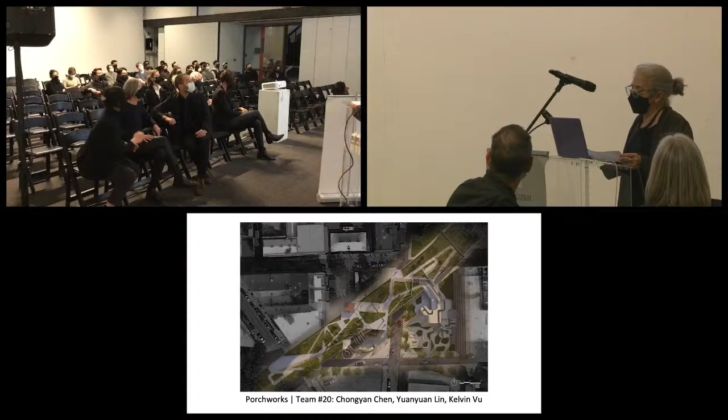Second place, Pop-Up by Team number 6, Qiyi Huang, Ravina Puri, and Valerie Tsi. Porchworks, Team number 20, another second place, Chongyan Chen, Yuanyuan Lin, and Kelvin Vu.

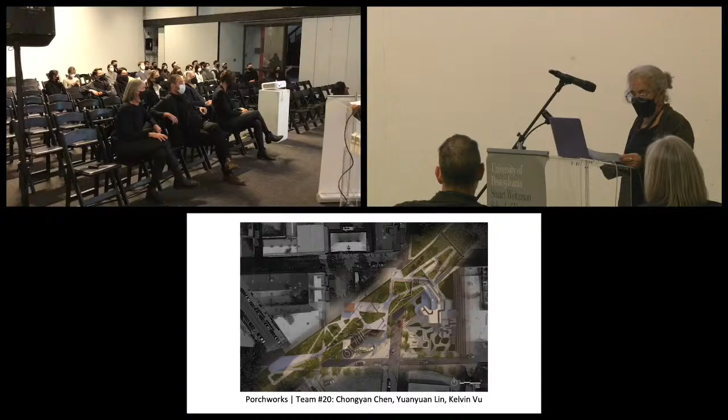The last second place is Porchworks, that was team number 20. The last one is The Glaze by team number 23, Chengnan Gao, Maxwell Lent, and Shi Yi Chi.

And then there was a host of honorable mentions. Transitory Permanence, Rachel Seto, Kang Truong, Ji Yi Zhang. That was another second place.

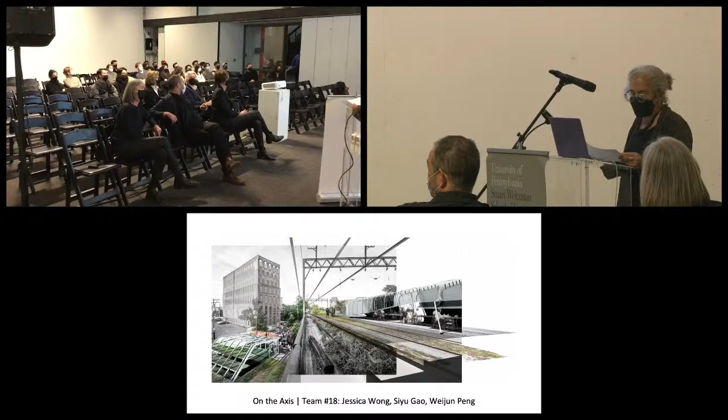Honorable mentions, Resurge, team number 9, Shi Shuang Song, Sophie Wajalewicz, and Grace Infante. Honorable mention on the Axis, Team 18, Jessica Wong, Siyu Gao, and Wei Jun Peng.

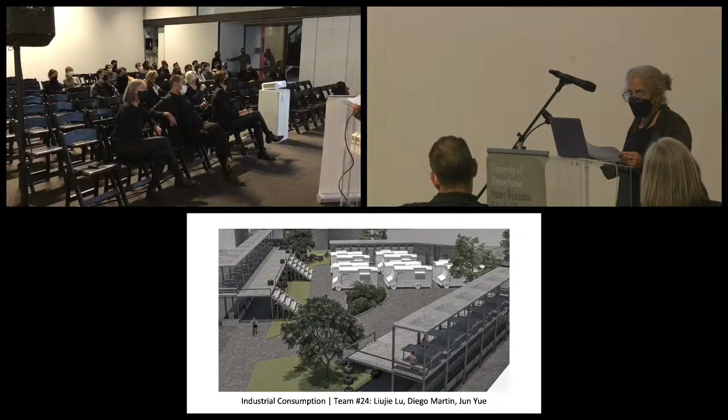Breathing Clouds, Team number 22, Hedi Mao, Shenyi Zhang, and Xiaoyu Zhou. Industrial Consumption by Team number 24, Liujie Lu, Diego Martin, and Jun Yue. And the last honorable mention team, Daniel Lutze, Boyu Xiao, and Rongxuan Zhou.

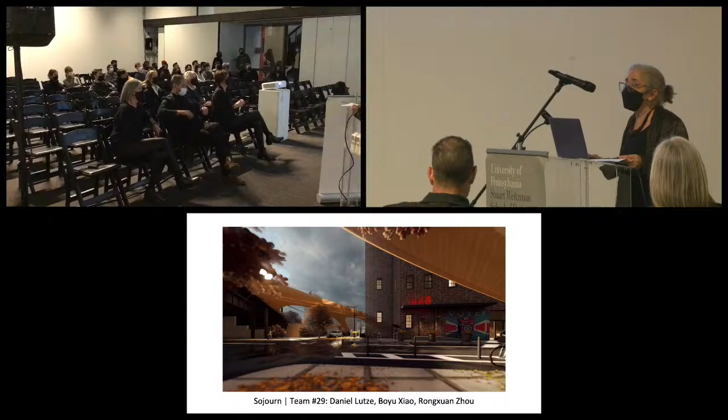Congratulations, everyone. They were just wonderful entries, as you can see, and we're really proud of our first-year students for doing this great, high-quality work. Congratulations, everyone.

Thank you, Annette, and thank you, Daniela, our 2 coordinators for first year, and of course, warmest congratulations to the students. Absolutely stunning work, really happy you won these awards, and proud of you. So with that, congratulations again.

We're going forward. Do we have another slide? Can I do it? Yeah, you can do one more. Back one, it goes back one. Back one? There you go. Thank you, Laurie. We're going to the presentation. Oh, that was interesting. No, I don't know how that happened. There you go. Am I standing on something? They keep it exciting, right? And keep you all awake.

Smith-Miller Hawkinson, one of my favorite offices in New York City. This is kind of interesting, you know, for all the people I know, there's very few architects that actually build in Manhattan, which is not an easy thing to do. Their office is one of the few that builds absolutely beautiful things in Manhattan, and so I thought it was time that Laurie came and showed us their beautiful work.

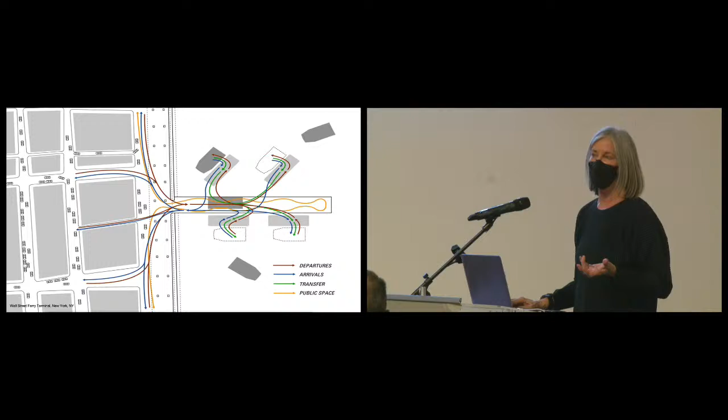We thought of this project as the gray in the middle of the pier - it just clips on the edge and leaves the majority of the space open, because there's very little open space in Lower Manhattan. We wanted that to be this kind of surface for people to just walk out of their offices, have lunch, and what have you.

So there you can see it clipped on. We made very large letters that you could see from a distance as you're coming in on the ferry. I thought of it as this kind of aircraft carrier, waiting, anticipating things that might happen on that open surface. This is the door as it opens, and it really tries to extend this building to be much bigger than it is in the space.

This is a photograph by Arietta Atali, who took a number of the black and white photos you'll see through this presentation. I love this one because it shows how thin that surface is between the inside and outside. Through a number of projects we were trying to find that continuity, that continuous condition from outside to inside, and the kind of extension of the door as it opens up - that idea of thinness. This is a model that I think Ferda made, if I'm not mistaken.

This is a model for Corning, in the very beginning, where we were charged with creating a new entrance to the building - a new piece on the front of the museum up in Corning, New York.

One of the ideas came because when we first drove up there to see the site, I kept looking and thinking, where is the glass? I kept scanning the landscape for glass, thinking there's gotta be glass here somewhere. So that was something we tried to demonstrate at the entry, where you'd see glass on edge and create this attenuated surface, this condition of entry.

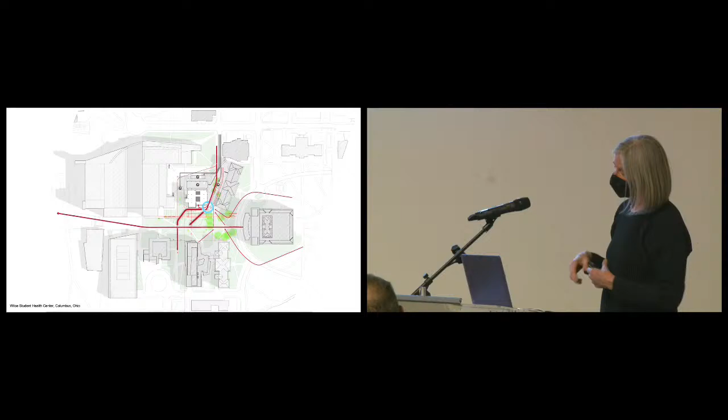So a similar condition here at Ohio, where we're adding on to these really brutalist buildings. We had a Wallace Harrison building we were adding onto at Corning. Here, we're putting this new piece on this precast building, right off the oval at Ohio State University. There's a tremendous amount of circulation going back and forth across campus, cutting through, and this is the corner where we're operating.

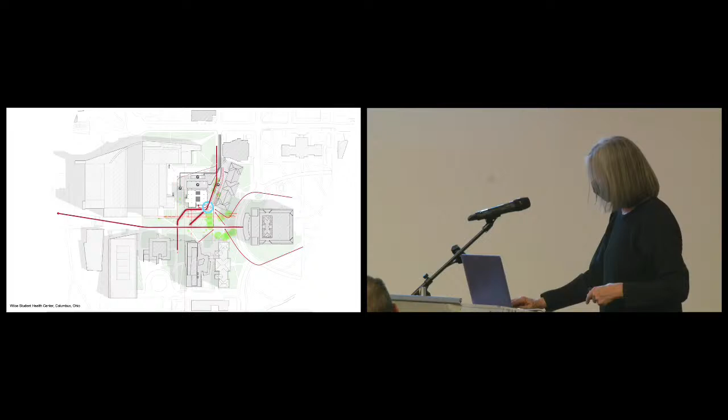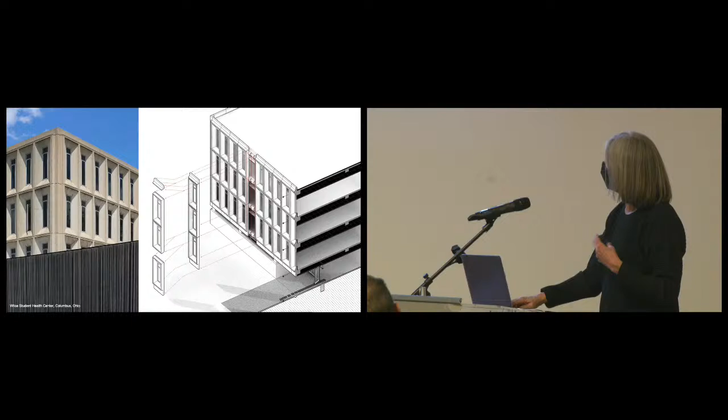We wanted to work here with this kind of vocabulary of the precast, but for our addition, thinking about what we could do today with this material that we couldn't do when this was built—maybe they could do it too. It's kind of ridiculous to say you couldn't, but we started to experiment with this precast panel, wanting to make a very soft, curtain-like effect, instead of the hard window frame on the upper building, so they'd share the same system but be expressed very differently.

So we started—let's see, I don't know why it's not happy. It's just not happy, I don't know why it's doing that, it's like flying around here. But I'll try it—well, I can see it here. It's still on the stream. Am I standing on something? It's like, if it can go wrong, it will go wrong, right? Maybe I should be advancing it with this thing—do you think that would help? Oh no, it doesn't even like this, it doesn't really like this. There it is, there it is. I'll go back one. It's okay.

I was telling Hannah that I once spoke in Mexico City and my whole slide tray was flipped upside down and went into people's coffee. So this is not bad, this is not bad at all. I don't know. You want to have a slide tray? I know slide trays—remember slide trays?

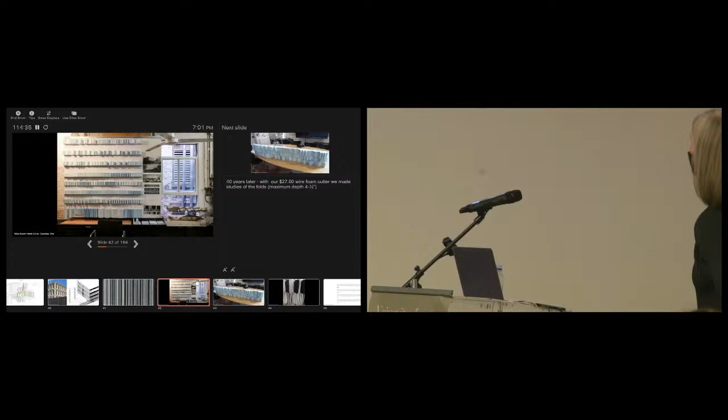Okay, so then we sent those out, we got the pieces made. We went to Columbus to look at them in the light, because you always want to look at them in the light of the place where you're working, since the light's very different in New York. So we looked at them and changed some things. These are some of the profiles that we ended up working with. We had 4 panels, and the edge pieces are all the same dimension, so we could flip these around and get more combinations than one would get by just layering them.

This is the construction drawing. You wouldn't have this today, by the way, because you'd have a very ugly Revit file — I just say ugly in quotes. But what you're seeing here is the form, and then there's the cast piece.

And there it is, going on the truck. So you have to figure out it's got to fit on the back of a flatbed, because it's got to get to the site. And there, dropping it in place. We had excavated some of the existing building so that it slides in. I love to see something that's so small become so big.

So then where the kind of softness ends, right where that's the base piece, right before it hits the ground — trying to control all of that. And so this is the guy, it's kind of twisting and taking you in. And then this curtain's on the 2 sides.

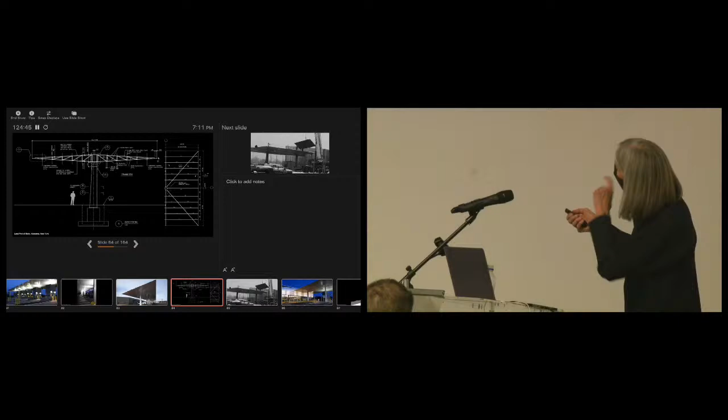But you know, if you get taken in here, that's where your car gets taken apart. So you don't want to go there. But basically, you're coming through, you end up here, and then you go. So here's the section through that.

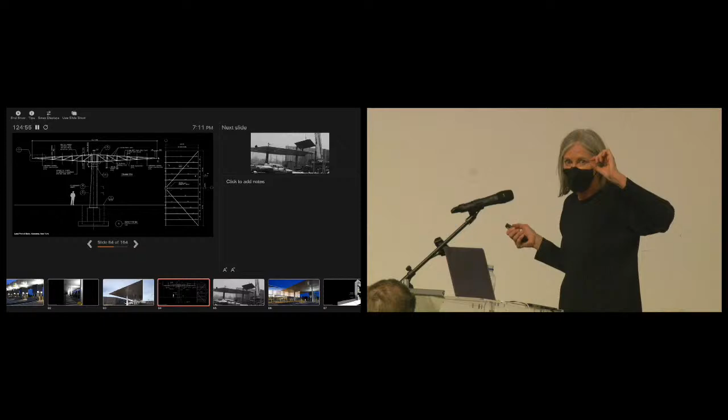So you can see that what we're doing is tapering to get to this very, very thin edge, so we get that appearance of lightness, even though in the center you can't really feel it because you're under it and you don't know its thickness. So this tapering happens on all sides.

And this is the rain gutter right there, so you have a little place for the rain to come. This is Sean Gallagher, if anybody knows Sean Gallagher. He did this—he actually works for DSR. He's really good. So here's it getting assembled.

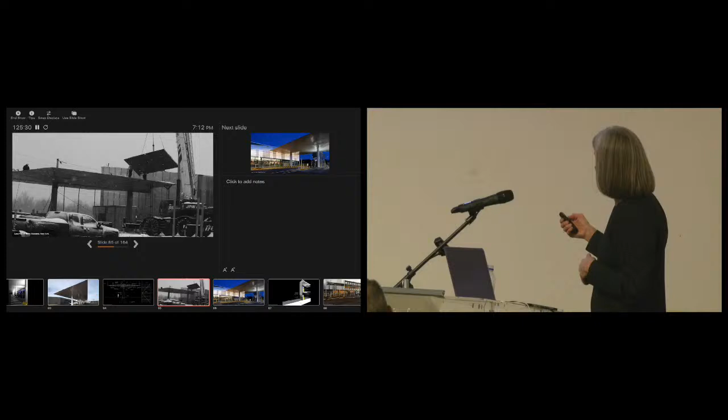Again, the pieces have to come in those dimensions. They're so cold up there—imagine touching the steel. This is one of the places where they say it's like 38 below, you know, in New York, and it's usually Massena.

So this is at the administration building, where the passenger cars pass through. Again, you would never go in there unless there's something wrong. But one of the things we developed at the facade was, because there's a security issue here, but also the question of bringing natural light in.

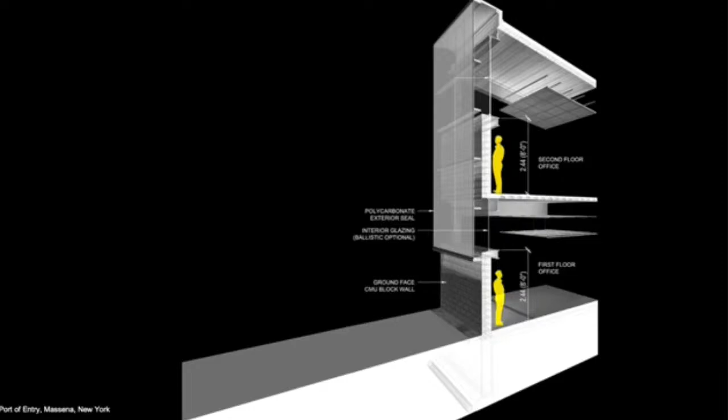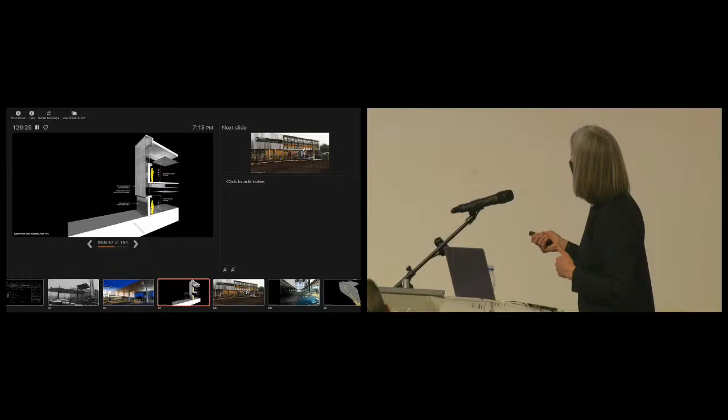So we made a double skin—we have a concrete block, but then we get clerestories, and in some of these we actually cut into the wall. The polycarbonate provides this layer of transparency and translucency for bringing light in, in this case from the north. And then here it is under construction.

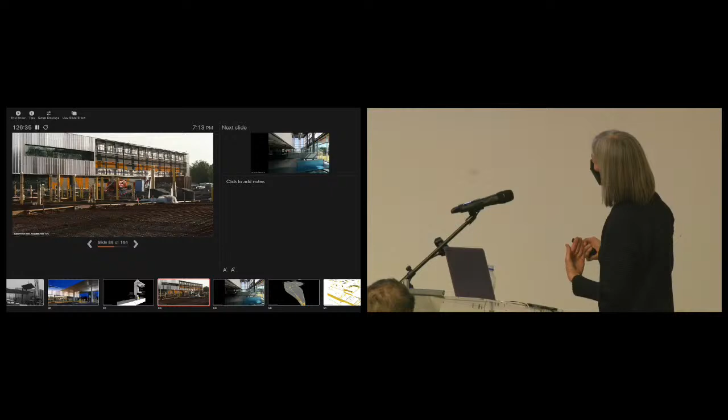So you can see we took the letters of the United States and we brought them up under the translucency, so that they kind of glow at night. And we used this material, the metal that's on yield signs—just like the sign is made out of, in that color. So that was what we used to make the big letters.

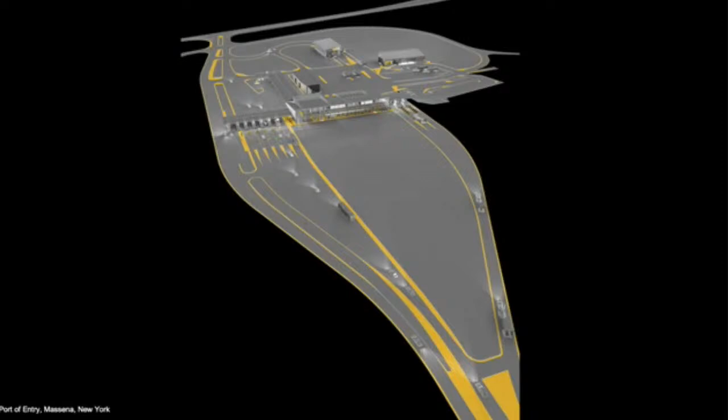So you see, we learned from Barbara. And then here's inside the building, right outside of passenger cars, and some of the structures, truss turn sideways for lateral bracing, the polycarbonate, and then this idea of no curbs. We also had this idea of yellow—we worked with Pentagram—being this area where it was safe to walk, where people could go.

So it was this wayfinding system, so wherever there's yellow, it was safe. Here's a crazy drawing by Sean Gallagher of all the yellow in the project, and you find it in buildings, so it kind of leads you into buildings, it leads you up to buildings. It's a place that's safe if you're a pedestrian.

So here's the site, and there's the yellow, and no curbs, and a lot of infrastructure for water, because we had to keep the existing port over here while we're building this new one. There's a river to the south, and we're making sure the water can move and run, and all the drainage can move back to the river and also be caught in certain areas and retained in bioswales.

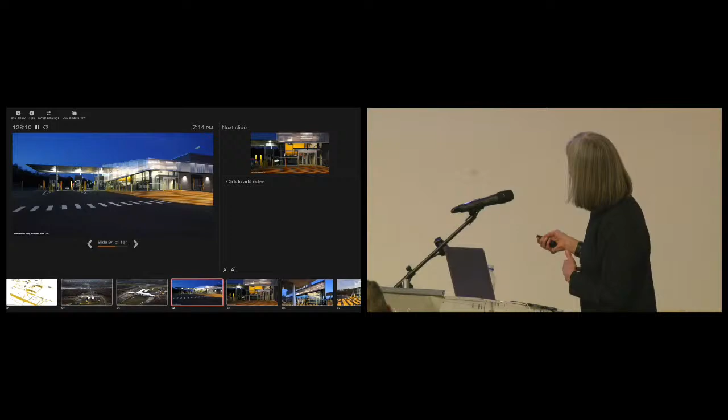So this is a kind of early on photo. Here's some of that yellow, you kind of walk across the white, and then this is all safe to walk on, safe to walk. Because it's all about cars moving and trucks moving, so you're kind of like, where do I walk?

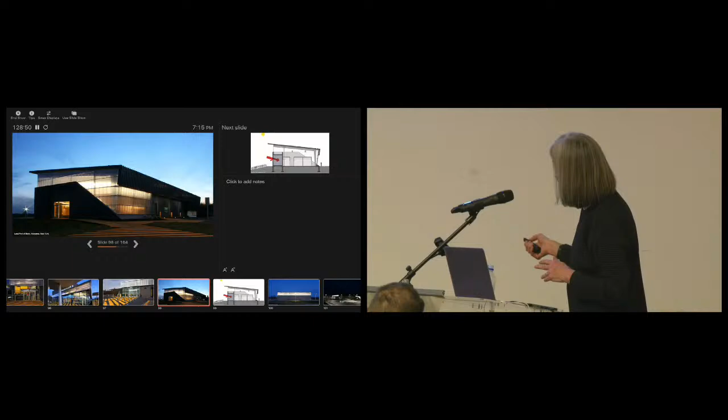Some details of the buildings. This is one of Henry's handrails that just kind of takes you up into this space where secondary or commercial vehicles are, connected right onto a kind of a funky edge there. This is a building for customs, yellow inside, so you kind of move here and go in.

This building has the fire suppression system. We couldn't put it in the ground because the water table was so high, so we decided to put it in the building. So this is really the fire suppression system.

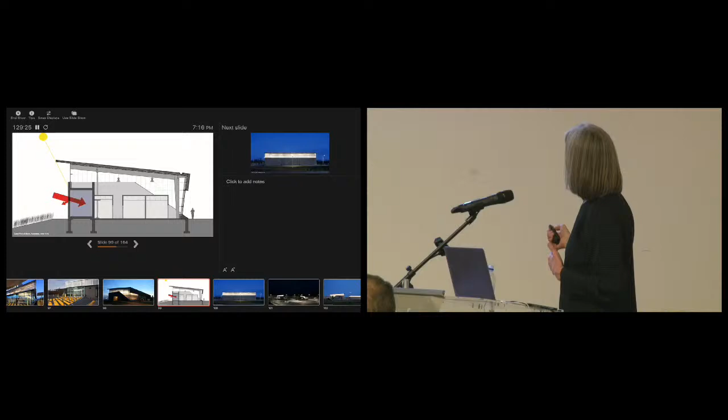This is some bioswale out here, but it's also acting as a counterweight. This column is working in tension, and this one is working in compression. This is compression, this is tension, holding it down, correct? Not propping it up. And then this is the kind of counterweight to that piece.

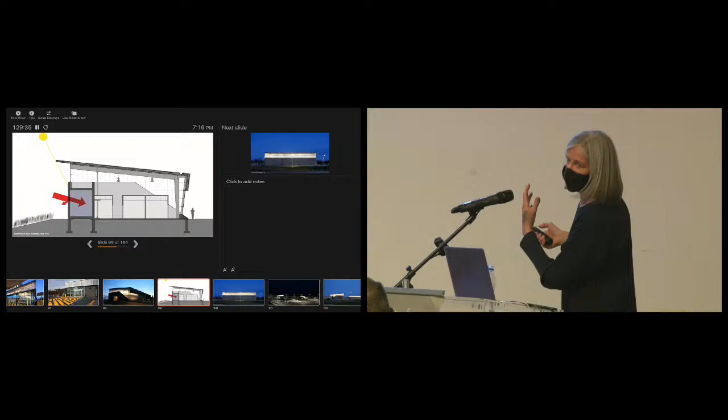So that's the facade on the exterior. So you're seeing some of that structure. Those are those tension columns, they're not really props. And then it kind of appears that this whole roof is floating, which is what we were interested in trying to achieve here, these floating conditions.

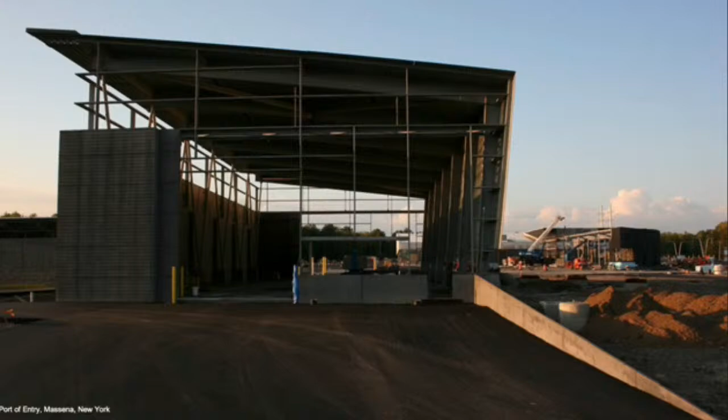And these are, I love this kind of very sinister view of this at night, two buildings. So I'm going to show you the second building, which is a truck scanning building, a whole building for scanning trucks. And again, this one is a cantilever, there's props.

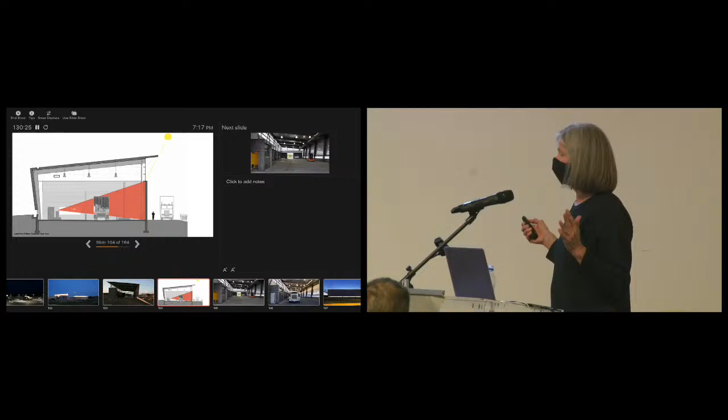And we convinced them - they wanted to buy a Butler building, just something off the shelf. Oh, we can buy a Butler building. And we said, no, we can build something for the same price as a Butler building. So we did, somehow we did it.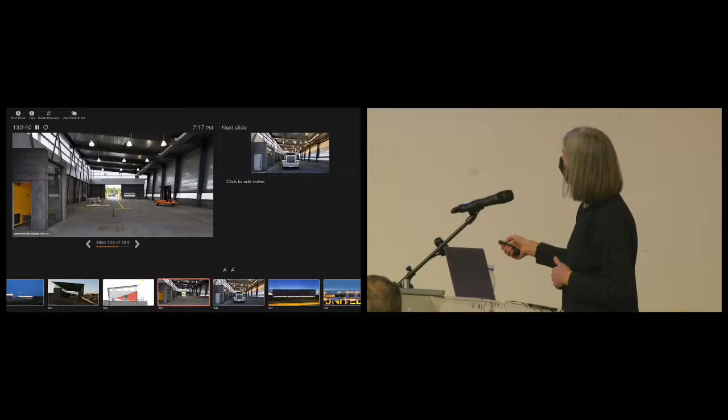But so this is all about just scanning a truck. The truck comes in, goes yellow, there's the yellow. This is where the person who's in the truck goes. They close the door, boom, they shoot it. There's the truck. But you're seeing again the structure that's propping, and this is in compression, and then bringing light in. In this case, the earth comes up against the building, and then you get this slot of a kind of floating condition at the exterior. And then these are those letters that fold up underneath.

So one more here is the Zerega Avenue. This is an EMS station in the Bronx. And this is a very little building. It's like fire department EMS, one of the first buildings that EMS built up in the Bronx.

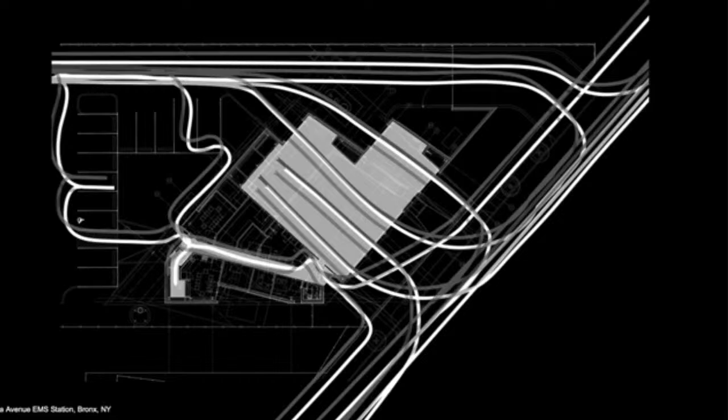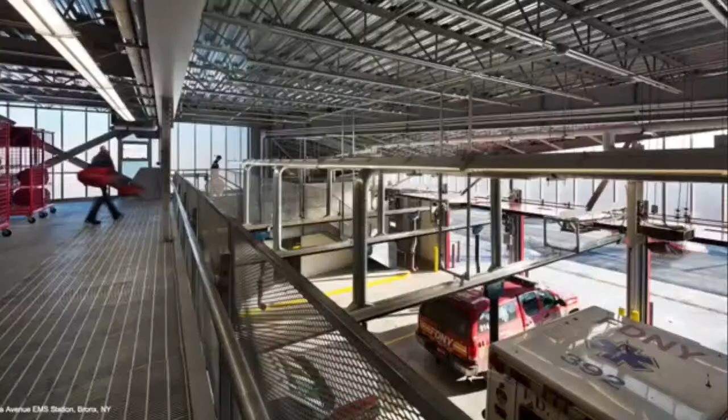It has a lot of movement and cars and vehicles going in and out through this little structure, as well as we're trying to move the air through it. And we tried to think how we could bring as much resiliency to the roof, and then natural ventilation as possible. It's a very rough and ready building.

This is really open so that they can hose all this down in here, and the vehicles are going in and out. And this is this giant gusset plate that is bolted rather than welded. And some of the interior conditions where we're just exposing a lot of the workings of the building here.

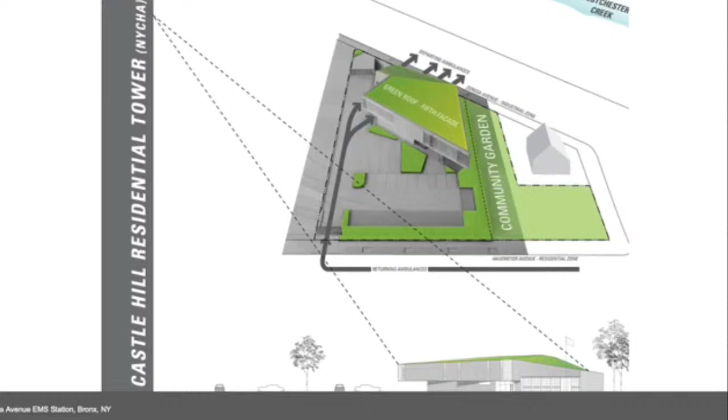And the roof of the building was meant to be a fifth facade. There's a very large NYCHA building, and this little building serves it as well. So this is a view from that roof. And the roof is the first EMS station or fire station for the city that had a green roof, which they did not want.

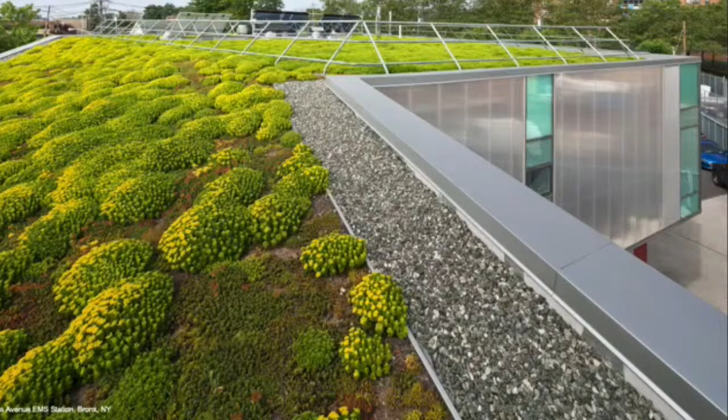And they were kind of saying, oh, we have a first green roof, but we had to convince them that it was a good idea. Some of the details, like the handrail, we're very into handrails, but leaning it in so it's not seen from the outside. Whenever you have a roof, you've got to have a handrail. So buyer beware, because it's something you get at the last minute, and it's not a pretty picture. We have hydronic hot water and solar tubes for bringing natural light down into the building.

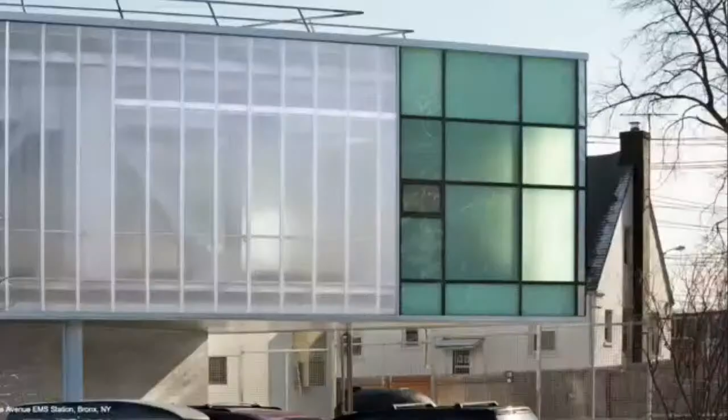We worked with Kate Orff, landscape architect from Scape, on this, and she and I argued with the city to have a cistern. There was a community garden next door, and we were keen on having the water from the roof captured here, and then there's a spigot that goes in, and the community garden gets free water, because we were kind of taking over the spot where their water was.

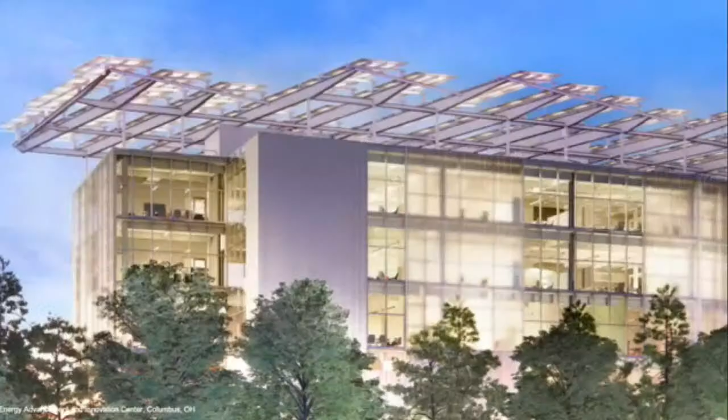So finally, this is all to talk about a project we're super excited to be working on now. You're always most interested in what you're doing right now, right? This is for the Energy Advancement and Innovation Center at OSU. It's a project that's going to support research and development for the next generation of smart energy systems. So it's really renewable energy that they're working on here.

And they're going to be drawing down from this solar canopy. This is a new campus - like every campus has a new tech campus or new incubator campus. This is Ohio State's new West Campus. None of these buildings are built yet, actually this one's just going up right now. The whole campus is over here on the other side of the river. This is our little building.

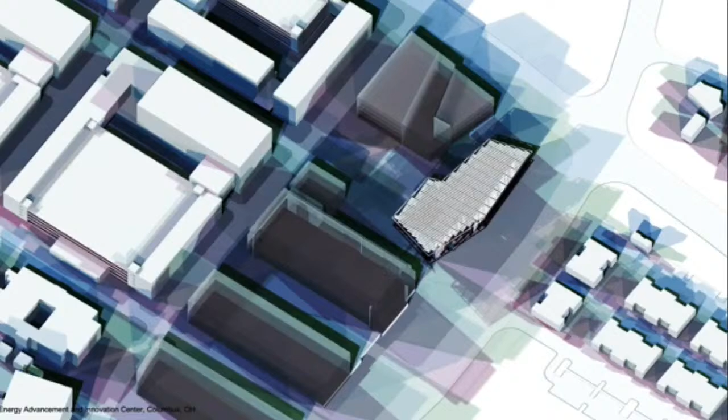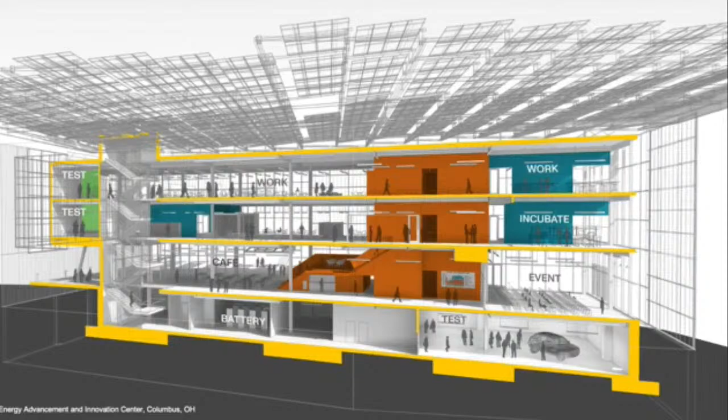We worked with them to shape things, make sure these were kind of clear of the solar, so that we get enough light on our building because we need the energy off of it. This is the program that we have inside. We've got testing pods, all kinds of - it's not really wet labs, but they're drawing, as I mentioned, parts of this DC power, and it's coming right down into these labs and they're working directly with DC power.

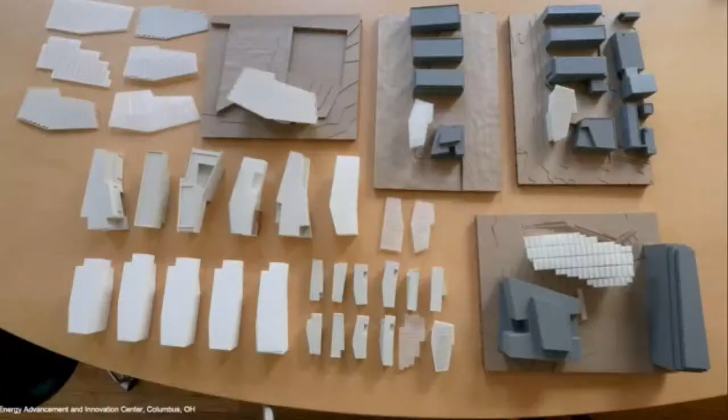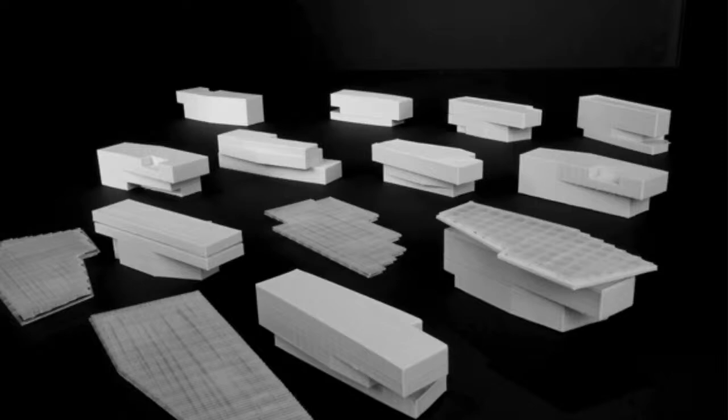The building is all electric, so we tried to run the whole thing off of the grid, but there are challenges right now with mechanical systems and warranties and things like that, but we're running as much of it as we can. I wanted to talk a little bit about the process for making a project like this, and the number of models you go through, that you just iterate. You've got all your MakerBots up there, which is what we've got too, and we're just looking at different configurations and shapes, both to make sure we get enough light on our roof, but also configuring that program so it gestures for a number of reasons, gesturing towards a plaza, kind of facing the east, bringing a lot of light into the building.

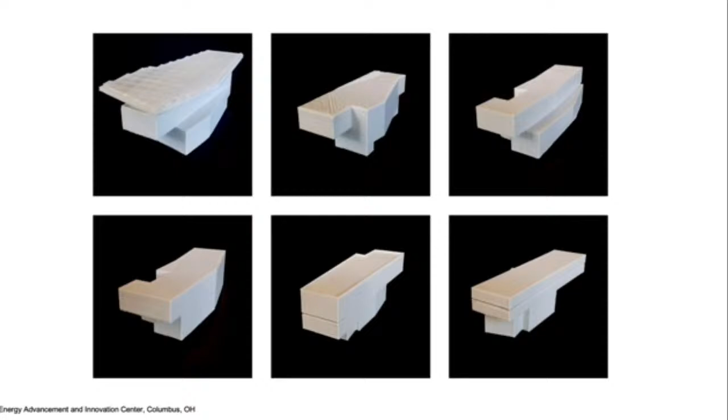And these are just some of those little study models that are lying all over the place in our office, and then they get a little more and more involved, and then the roof. So a solar - you're doing a solar farm in your studio or something like that, right? So Ferry mentioned that to me.

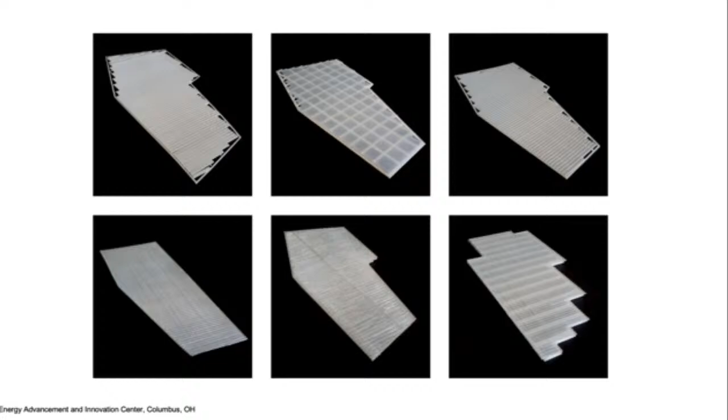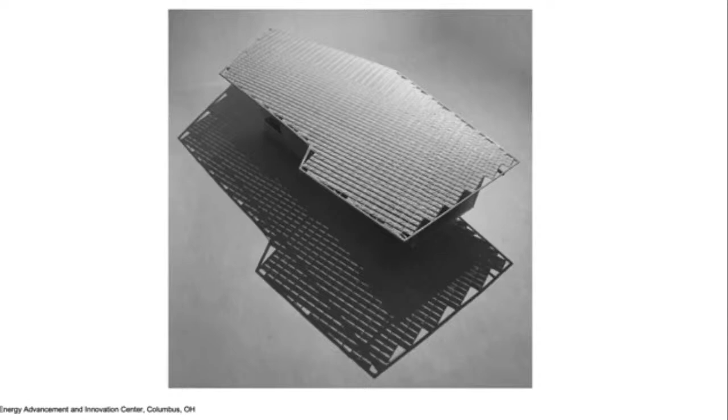So we wanted to bring this idea of this 900 panel solar canopy to this building, both iconically, but also so that it's really working, right? It's the renewable energy they're working on in the building. But the systems, the racking systems are not the prettiest. So we were studying these things, and studying how to group them, what kind of framing we would have. Do we need steel around the edge? Can we have a ragged edge? So we were making models to look at those. And then we realized it was too solid, that we needed to bring light in through it. So we made a kind of plaid, to bring air and light, and this dappled light down to the piazza in front of it, so it wouldn't just be this heavy lid on the building. So that whole system became a whole study project in itself.

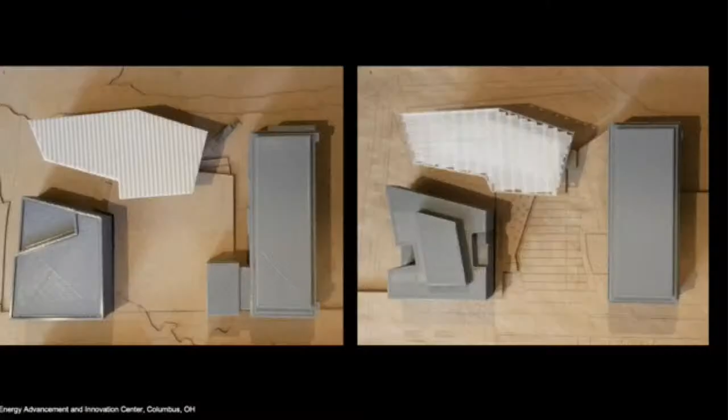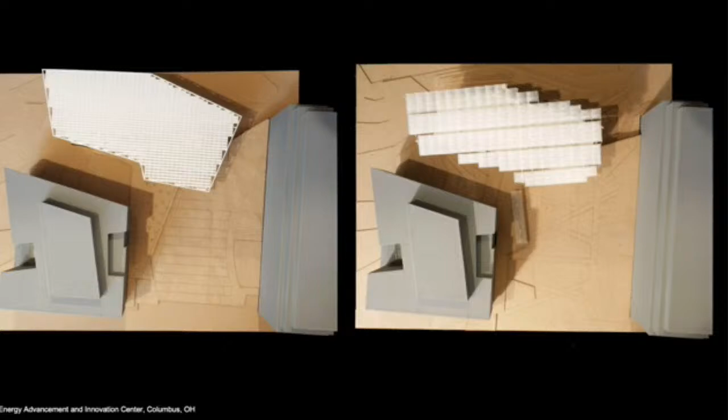So there's the wrapper, and then there's the building. Here are two other models studying different iterations. At first we thought this was impossible, because the panels are very precise dimensions unless you're customizing them. Then here we have that steel frame, which we eventually got rid of, letting the edge be ragged on the roof.

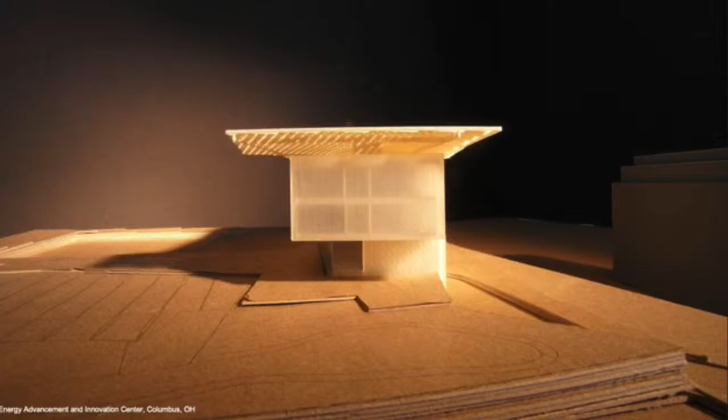These are all tiny little models we studied, again to see the effect of the light coming through. Because the panels aren't translucent, we used a translucent material to try to get that lightness. You can have them in glass, but it's not as performative. So we're uplighting the canopy from below so it can be like our canopy in Messina, a glowing piece to provide lighting at the end.

So these are more study models of the building, trying to bring a lot of daylight into these working labs. This is the east facade, and here's one of, not the final model. We had to open it up where the stair is, finding this kind of tartan grid to express the light.

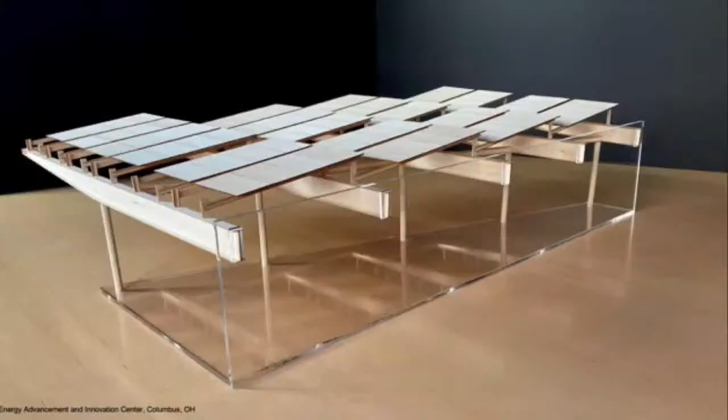This is a larger model, where we are here. You see now there's no edge, no steel edge, right? It's very light, no edge. We're trying to express the edge of the panel, like the glass at Corning, so you understand what that is, and it's not just caught in this big frame. This model just cracks me up.

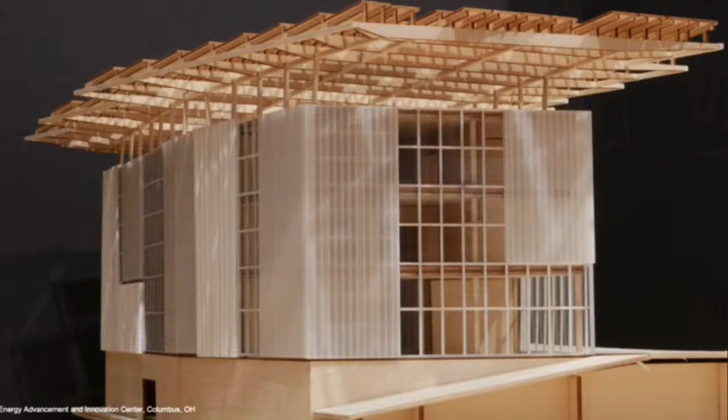We're looking at it, and it's like a Fibonacci series developing on the facade. In some of these models we're studying again the effect of light on the facade. You see it's very raggedy, I like that kind of raggedy business up at the edge, up at the top. Here's a rendering of the model.

And this is the very large curtain piece, which is softer, the polycarbonate clear glazing. There's a large meeting room in here. But you get again this sense that these are much lighter. Remember we had the big steel around the edge, which we worked very hard to get rid of. And then again, this gets uplit.

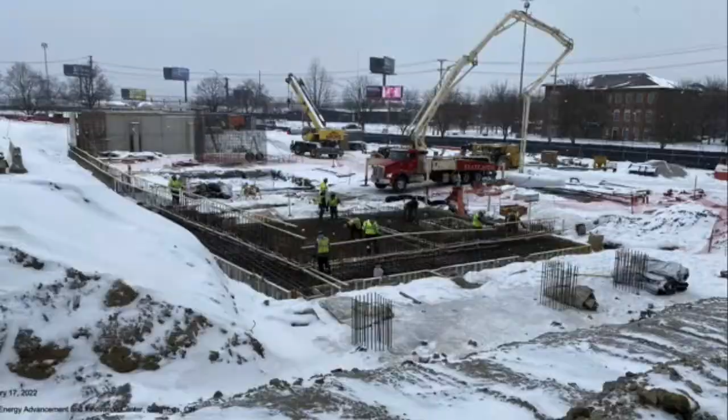This was taken not long ago. This was taken yesterday, Lindsay from our office is out there, and it's in the ground, so it's very exciting. This is the view from the West Plaza it sits on. The building is going up right now, but we pulled away so you could get this view of the stadium from the open space. There'll be another building here, but the idea is to create this very transparent condition moving from east to west.